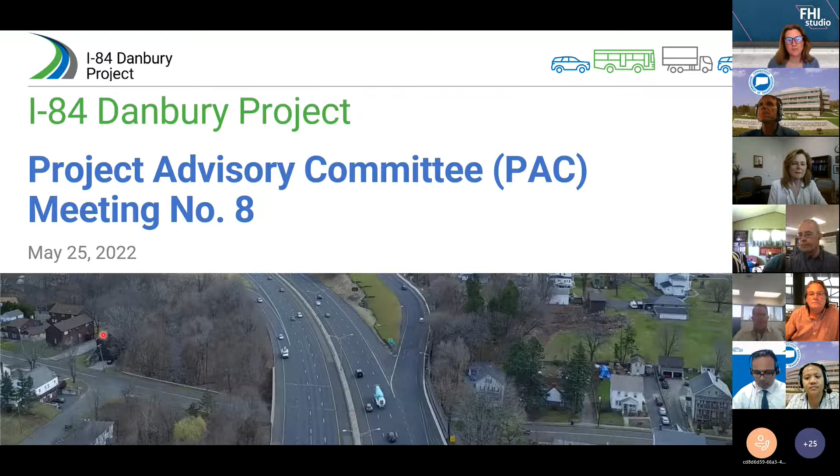Thank you. All right, welcome everyone. This is our 8th Project Advisory Committee meeting for the I-84 Danbury project. We thank you for giving us an hour and a half of your time today. We know that we'll give you some new information, and we hope that you'll appreciate it and have a lot of questions, and we'll have a great discussion.

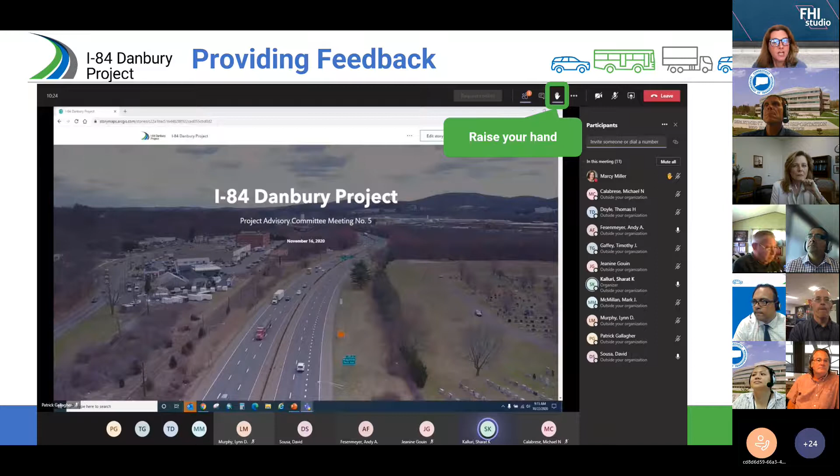I do want to mention a couple of things. We have some new speakers today, which is pretty cool. As many of you might have heard, Yolanda Antoniak has retired from the department, and we have Krishaline Macrahan, who has, I don't want to say taken her place, but she's taken over a prominent role in this project, and she's going to be giving a portion of the presentation today. So you'll hear from her. And moving forward, she's someone that we're going to work closely with.

We also have Jeanine Gouin. You all know Sharat. I don't think he needs a big introduction. And then Rick Black from SLR Consulting is also going to be there. And Andy often closes out our presentation, so we will also hear from him. And the other person from the department that I want to mention, who is not on the agenda, is Neil Patel. He is a big player and decision maker in this process, so he might be answering some questions as we go through today's meeting.

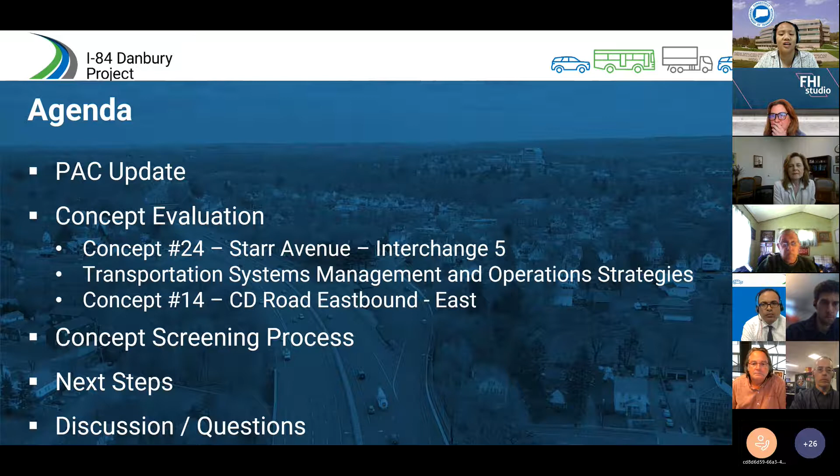We're also going to talk about the concept screening process, then next steps or the schedule of this project. And lastly, we will end this meeting with open discussion and questions. Next up. Okay, for the PAC update.

Since the last PAC meeting in November of 2021, we met with the New York towns virtually in December of last year. We also have a new PAC member, and we recently published a spring newsletter. We also added more concepts to the website. The newsletter and the new concepts are all available on our project website at www.i84danbury.com. So please visit that.

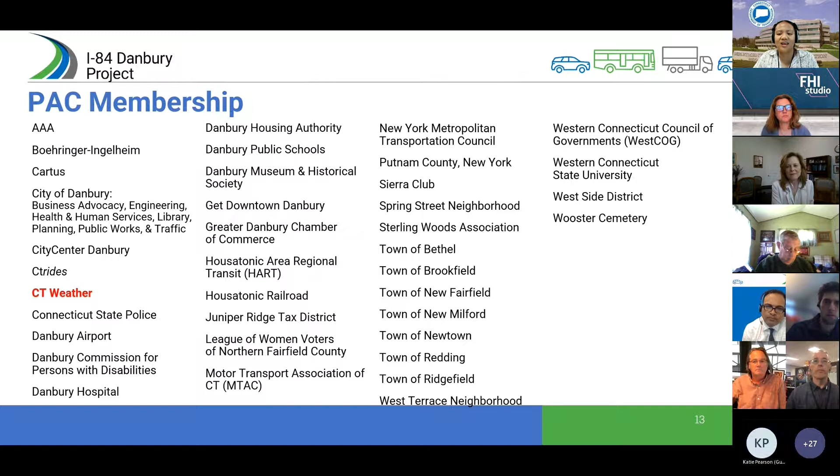Also, we have attended pop-up events in Danbury, and we continue to create social media content. We've been actively posting on Instagram and Twitter, so visit us at I-84 Danbury. Here's a list of our PAC members, and we welcome CT Weather as our newest member, as marked in red here. And with that, I will pass the presentation to Jeanine.

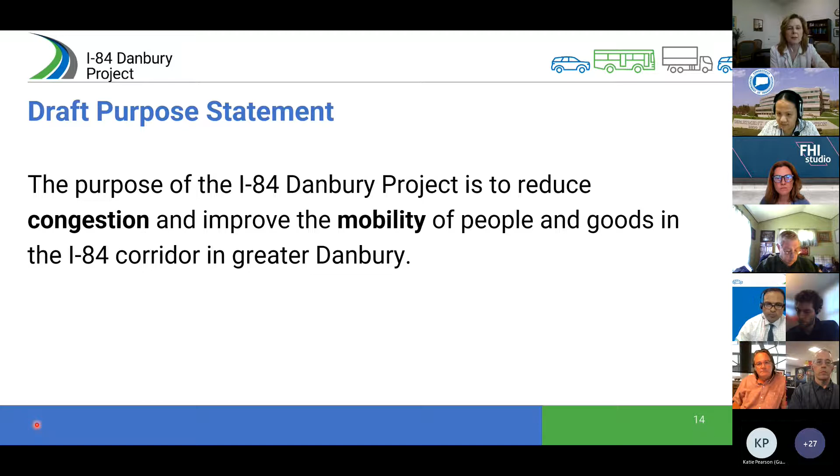And I just want to recall that congestion, as we've defined it, is characterized by slower speeds, longer delays, and queuing, something we've all experienced if we've driven on I-84 in Danbury. And mobility is the ability of a transportation system to effectively move both people and goods from one place to another. So they're related cousins, but they're different as well. So we can go to the next slide.

So how will that purpose statement be used? We're going to present a number of concepts today, as we did at the November meeting. These are partial solutions. Some are in discrete locations in the project area. Some are associated with the main line, others with a particular segment or an interchange. Each is being evaluated for its potential, first and foremost, to meet the project purpose. Does it reduce congestion, improve mobility, or does it have the potential to?

If the answer is yes, the concept moves forward. If it's no, it's eliminated from further consideration. And if it partially meets or has the potential to add to those objectives, then it moves forward to the next phase of analysis. Some of this will become clearer today, as Rick Black later in the presentation is going to talk about our screening analysis and how concepts move forward and how we will be evaluating them into full solutions.

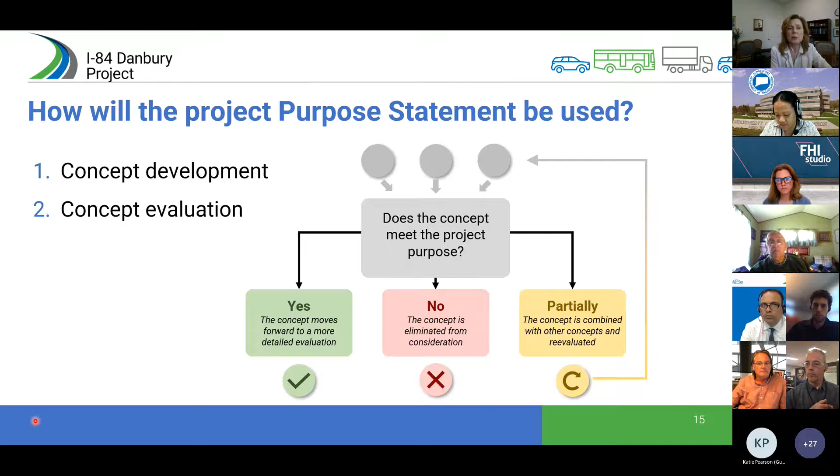You can go to the next slide. And I think you go, yeah, one more. So we're going to be looking at three concepts. We're going to start with concept 24, which I will present. And then Sharat will cover the dynamic lane use, which we also call TSMO, which I can never remember what it means, but Krishaleen just went through that. And then finally, we'll look at concept 14.

And I just want to acclimate everyone. You see in small green squares, we have the exit numbers, and then we've got Route 7 coming in sort of middle screen towards the bottom, and then upper right screen. And so the three concepts that we're going to look at today pretty much occur between the two locations where Route 7 joins and is parallel with I-84.

Okay, concept evaluation. Pop to the next one. So as with all of the concepts that we have and will evaluate, we look at a number of factors, including how the concept would affect traffic operations, effects to the mainline I-84, constructability. We look at environmental impacts, and we look at really very preliminary sort of order of magnitude cost estimates. So that's a constant. You've seen these before, and you will see them again.

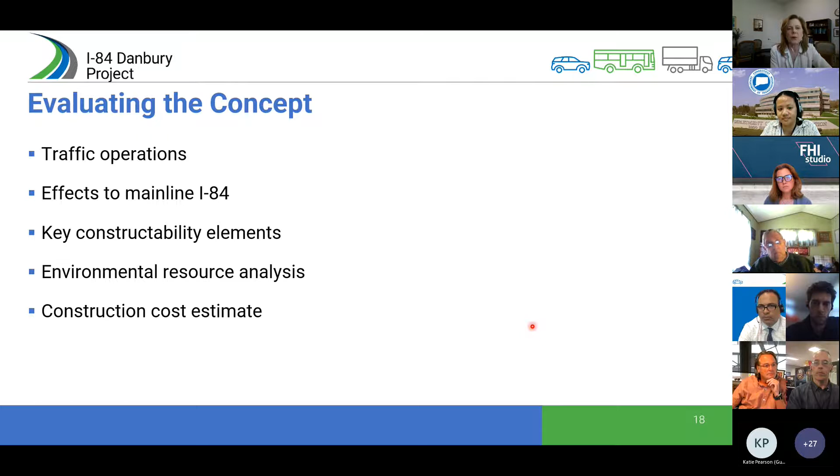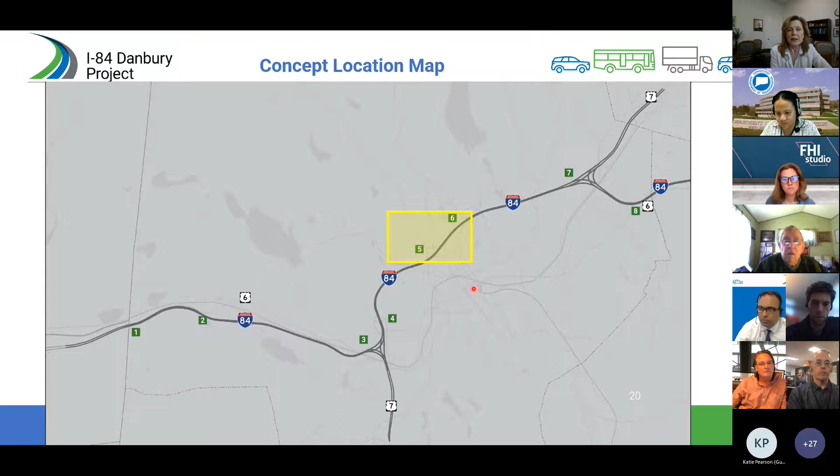Next slide. So yeah, concept 24 we call Starr Ave and interchange 5. This just gets us acclimated to where we are. And this particular concept occurs between interchanges 5 and 6. And again, this is sort of the segment of I-84 that is coincident with Route 7. And we call this the center portion of the study area.

So what is concept 24? There's two main aspects. It creates a new interchange on Starr Ave, and it adds what we call a collector distributor road, or a CD road. We will refer to that as we go through, between interchanges 5 and 6, which is essentially between where Main Street occurs and North Street.

And on this access, North Street will have full access to I-84. We'll also have access to the businesses on North Street that will be maintained. And it will provide access to the downtown area, as well as with many of the concepts that we'll look at, it gives us some opportunities to enhance bicycle and pedestrian use.

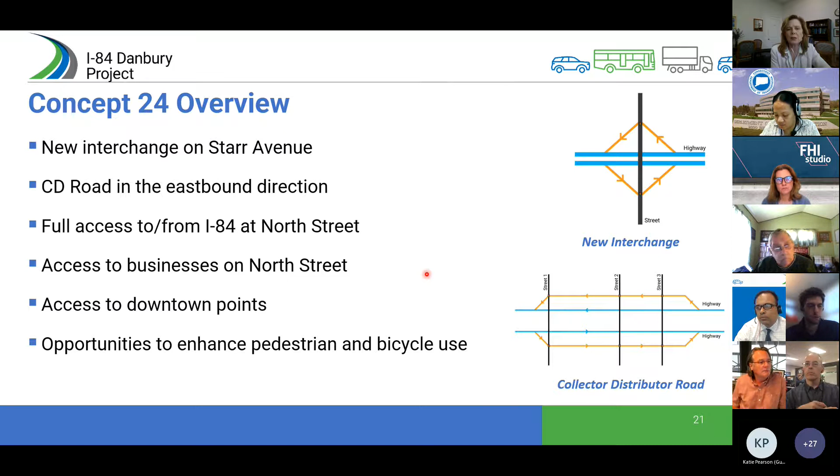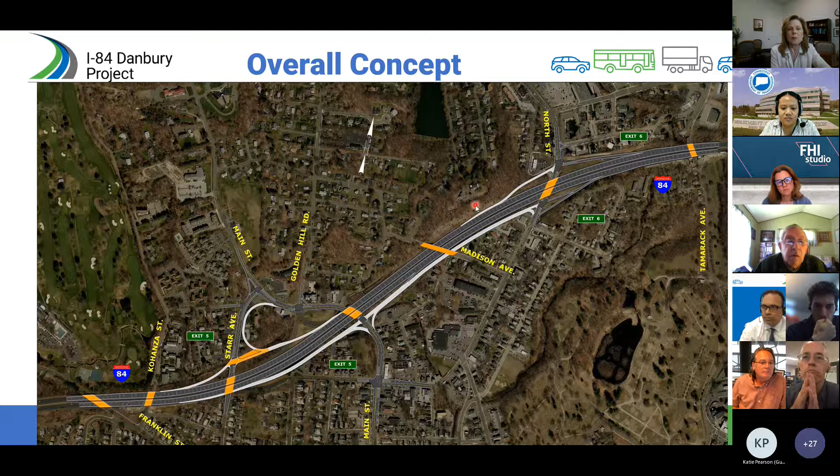So this is, and Sharat will zoom in and out. This is just an overhead view with the proposed new additions shown in that light gray. Any bridges that would be expanded or replaced are shown in orange. And then, westbound, we see the existing westbound ramps at interchange 5. Sharat can maybe point those out. This shows up better in another slide later, but some of those existing ramps will be eliminated.

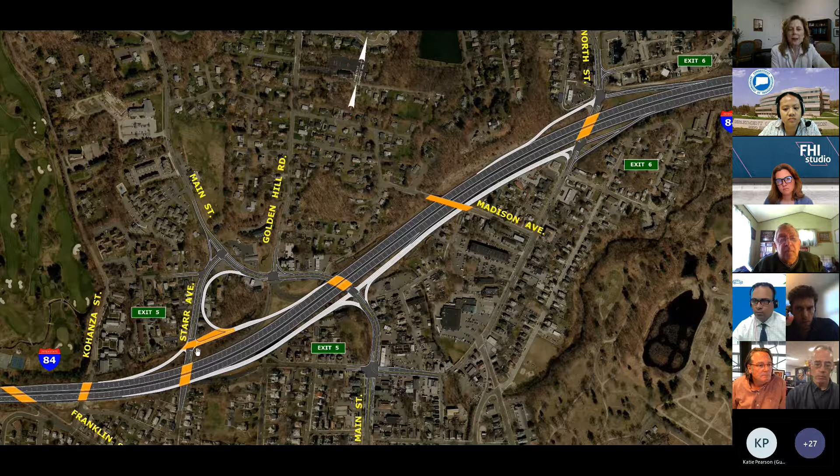And then the new interchange, which looks like a capital letter C, is proposed in the Starr Avenue area. Now the CD road, you see that on the lower part, will be a one-way, two-lane roadway that goes eastbound, and that will be parallel to I-84. Sharat, I don't know if there's anything else you want to zoom in on. I don't have anything else specifically. You can see exit 6 in the top right hand, and then exit 5 just to the right of where that capital C is. You can go to the next slide.

So one thing I want to point out, because we're looking at this concept sort of in isolation from the rest of any mainline improvements, it does not show, nor is it a surprise that it doesn't show, an improvement of congestion on the I-84 highway proper itself. But that is not necessarily the central focus of what we're trying to look at for this concept. We want to see more of the interchange and the local traffic patterns if this concept were actually implemented. So to evaluate the overall aspect of the continuity of I-84, we would have to look at this in combination with some others.

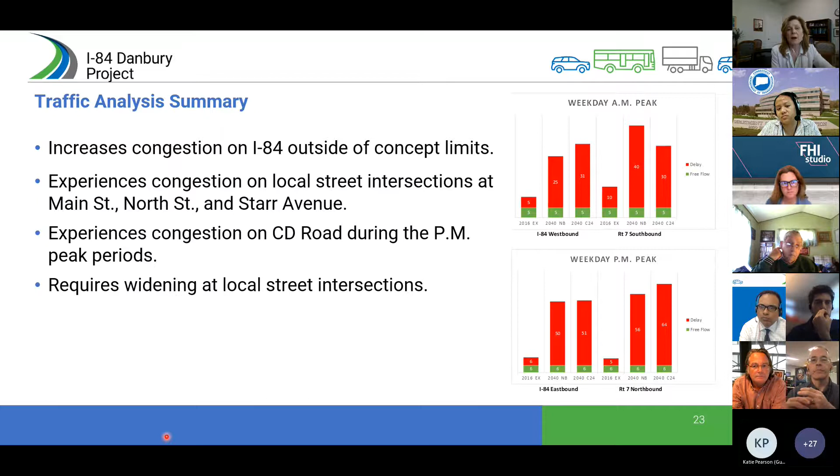But what we can see is that if this concept were implemented, it would actually increase congestion outside of the concept limits on local roads, and then on the CD road, as predicted by our traffic analysis during the afternoon peak hours. The other thing to note is that this concept would also require widening at local street intersections where they come in close proximity to the highway and to the new interchange.

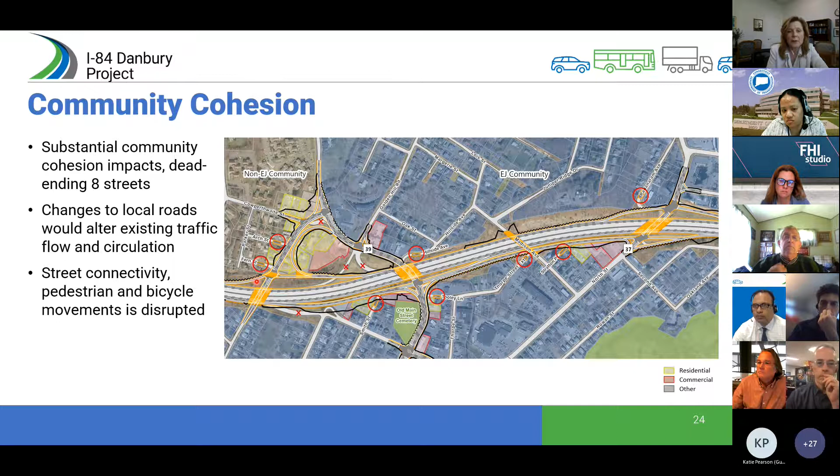The other thing, Sharat, if you can just sort of circle around the Starr Avenue new interchange area, you can see it's outside of that blue environmental justice community area. This entire neighborhood would be impacted under this concept. So all of the yellow and red shading would be land area that would need to be taken. And I think if we go to the next slide, we can really see that in much greater detail.

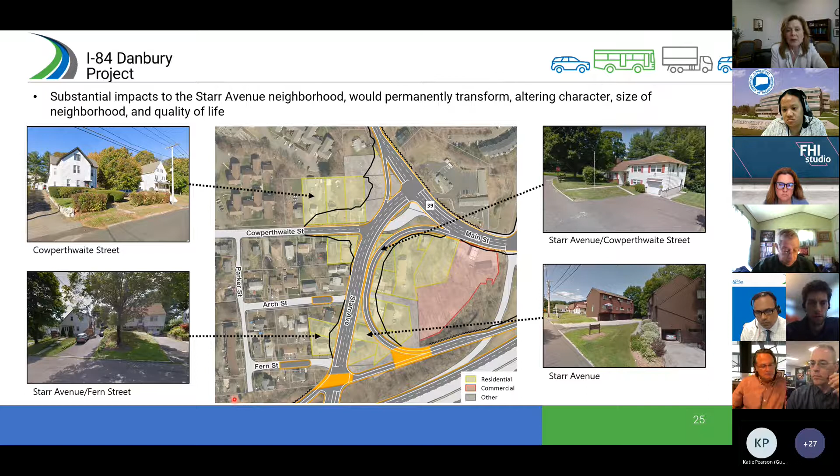It would also really heavily and irreparably impact this neighborhood, would take it from what it is today into primarily the off-ramp and some grassed areas at the expense of all of the current dwellings that we see here, as well as others that are not shown here. I think that was all I wanted to say about this slide.

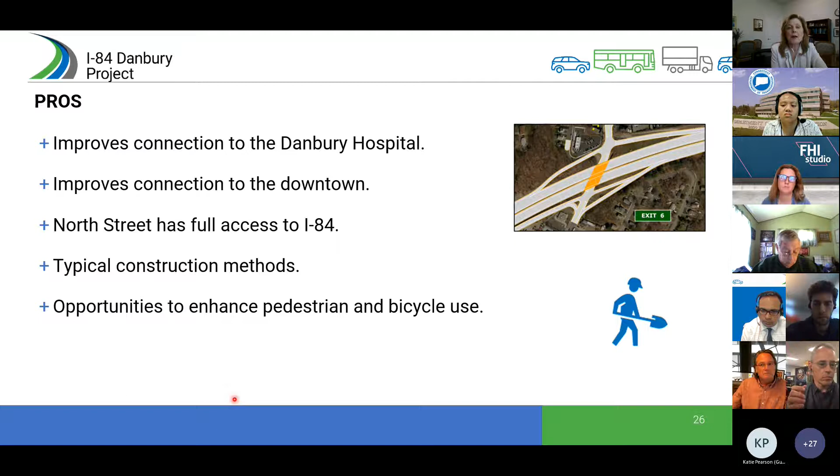So what are the advantages or pros of this concept? It would improve connection to Danbury Hospital and the downtown area. It would provide access from North Street. There's nothing particularly unusual about the construction methods that would be needed. And actually, this is a really important part: with every concept, we are looking at opportunities to enhance bicycle and pedestrian use. So wherever we're touching an area, that's going to come into play. How can we improve this for non-vehicular use as well as cars and buses and trucks coming on and off of the highway?

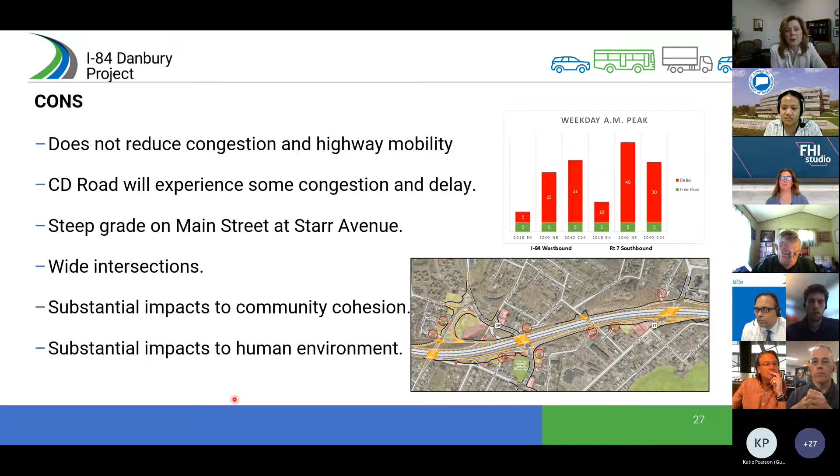Some of the cons: it wouldn't reduce congestion and improve highway mobility. It would cause some congestion and delay on the CD road. There are some fairly steep grades on Main Street at Starr Ave. We need to address that. It would create some wider intersections. But really, the headline here and the most significant piece of this is that this concept would result in substantial impacts, both to community cohesion and to neighborhoods, most notably the Starr Avenue neighborhood that we were just looking at in the last slide. So it's pretty significant.

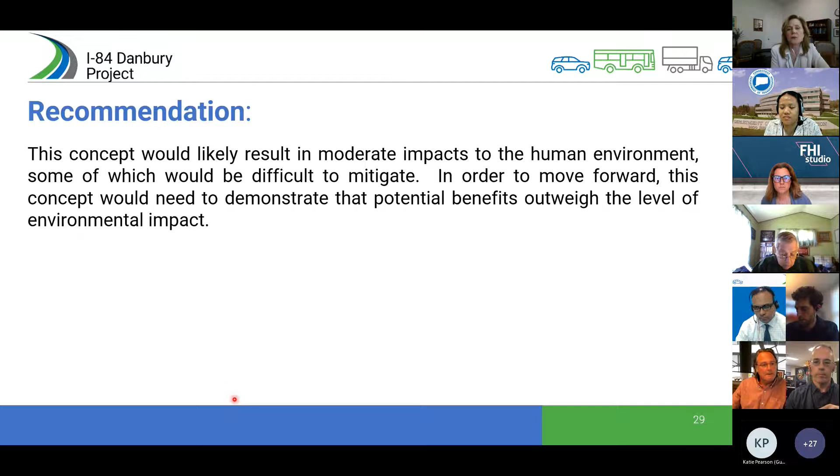So in summary, this concept is likely to result in impacts that would be difficult to mitigate, most specifically the impacts to neighborhoods and community continuity where roads would be dead-ended. In order to move forward with this concept, we would need to demonstrate that the potential benefits would outweigh the impacts. And this is true with many of the other ones that we look at. Keep that in mind when Rick speaks later about the various levels of screening analysis. I think that is the last slide for concept 24, and at that point, I'll open it to questions.

So back to me, I just want to chime in really quickly. If you're new to the PAC and you're not familiar with the term environmental justice or EJ, this is a term that represents certain populations that are typically underrepresented in our public process. So we are doing a little bit extra to make sure that their voices are heard. A lot of times this is lower income, minority, people with limited English proficiency. But it can also include students and seniors. So when Janine talks about these groups, it's really important, especially for any federal buy-in, that we're looking at these and making sure that we're reaching out to them.

Really good point, Marcy. That's the only thing I wanted to say. I'm happy you brought that up. And the only other thing I will say about that is we are held to a standard that, regardless of what project we do, we can't disproportionately impact environmental justice communities. Right. And some of these dead ends are bigger in this. So if anyone has any questions or comments, feel free to raise your hand or just chime in. We're very casual here.

Oh, I have a question. Barry. Have you reached out at all to any of the potentially impacted homes, or have you not even gotten to that stage? In other words, do you have any indication of how hard it would be to take those properties? It's a really good question. The answer is we have absolutely not. And this is why we are very early in our screening process. We would want to get to the point where we knew that a concept was going to move forward or had a high probability of going forward and being developed. We are not there yet.

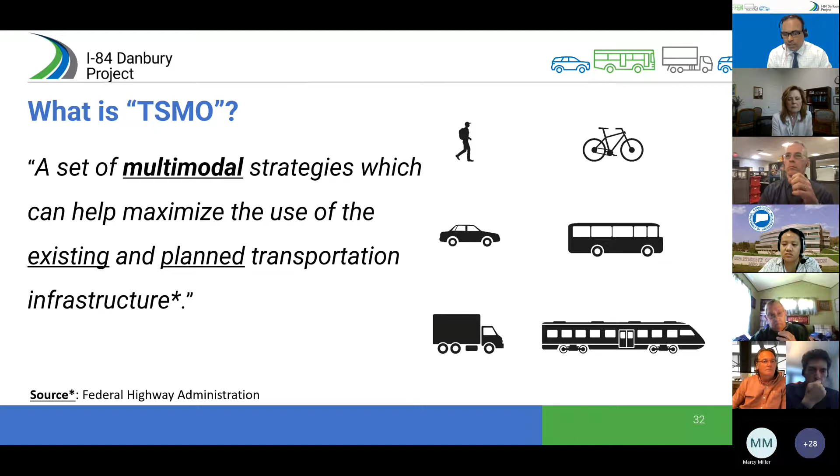And I know some of you attended our PAC meeting where we talked about Concept 4, which is a non-highway option, and that did incorporate some of the bus and rail recommendations. So why do TSMO? The important part of TSMO is it can be done in a very short time frame.

We're talking about like a 5 to 10 year time frame, maybe. It just requires limited funds, so it's not a big mega construction project. It's a very limited project with limited funds. And a lot of the TSMO options could use technology. So technology, as many of you know, is getting better and better every day, and technology allows things to be done in the TSMO option.

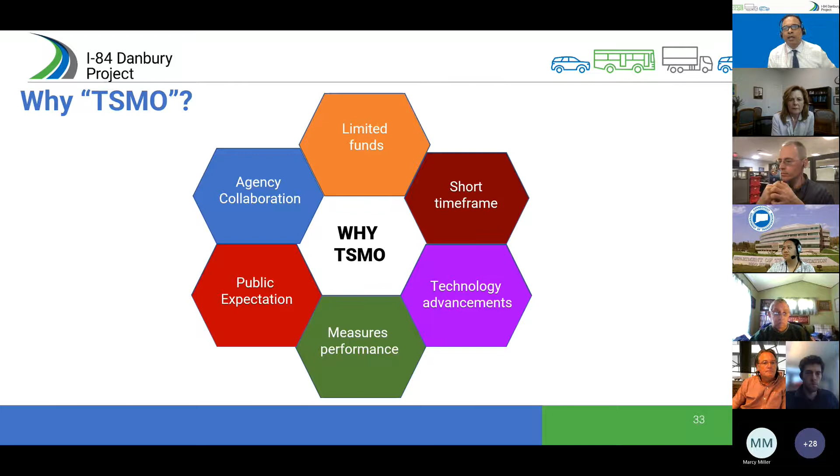So for the I-84 corridor, we looked at several of these strategies. There are almost 100 strategies in the TSMO handbook, and we kind of went through them and screened them and saw which ones apply. So some of these we're going to talk about, especially we're going to talk about the dynamic lane use in more detail today.

We did look at the temporary or hard shoulder running, which is the next one down. It didn't work, and this is some of the things you may have seen where you talk about bus on shoulder or cars on shoulder. I think Massachusetts runs this, where during the peak hours they run traffic on the shoulder. In this corridor, it doesn't work really well because the exits are too closely spaced. So we tried to look at this from an engineering standpoint. It didn't work too well.

The freeway ramp metering is a strategy which is used at the ramps, and you might have seen it mostly in the Midwest and South. I'm not sure how many of the states here use freeway ramp metering. Connecticut at one point had freeway ramp metering in Middletown, which got removed. It's essentially a signal that is provided at the ramp entrance, and traffic has to wait until the signal turns green.

We looked at some of these freeway ramp metering strategies at ramps along I-84 and Route 7. It didn't really work because it was creating a lot of congestion. Some of these ramps are really high volume ramps, and there was a lot of congestion being created on the side streets, and all the side streets were getting jammed. So freeway ramp metering, based on our evaluation, doesn't work well for this corridor.

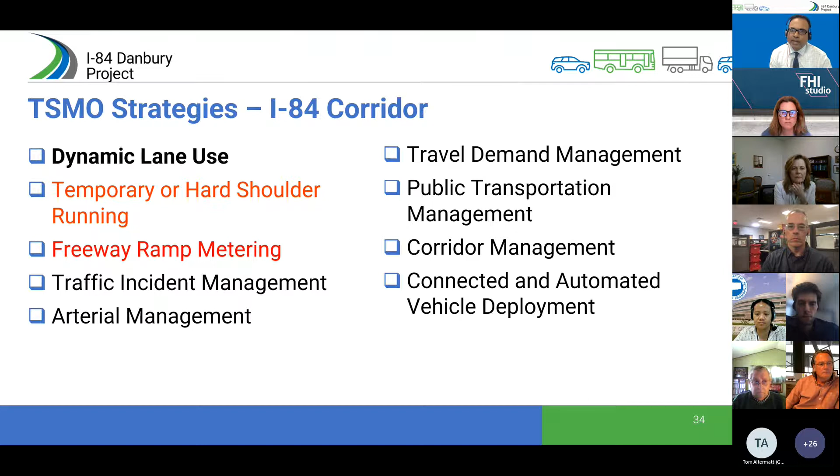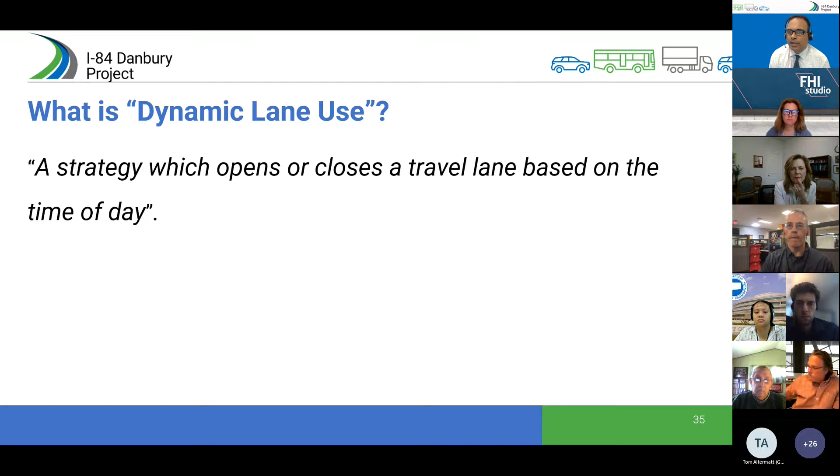So we're going to talk about dynamic lane use a little bit, and I'll get into a little bit of the details of what we are looking at here. What is dynamic lane use? So dynamic lane use is a strategy which opens or closes a travel lane based on the time of day. So essentially, there would be a travel lane that would be open or closed depending on the time of day. And you may have seen some of these applications. If you've traveled to the Tappan Zee Bridge, they have like a barrier that moves around during the time of day and shifts traffic around.

This is not exactly that, but something similar to that, where here we are applying dynamic lane use in the median. And the median, I'm assuming everyone can see my mouse here, but the median area is the area around the left side of the travel lanes. What we are proposing here is to widen that median area out to provide adequate shoulder, and use that shoulder for travel depending on the time of day.

So in the morning, for example, like this graphic shows, going towards New York where the volume is heavier, we would open that lane on the left side and traffic could now use the 4 lanes. This would essentially be the shoulder. And this is kind of done in many parts. People have used it in Massachusetts and other places where the shoulder is available for traffic to traverse on. And this will be indicated by that green arrow that says it's open.

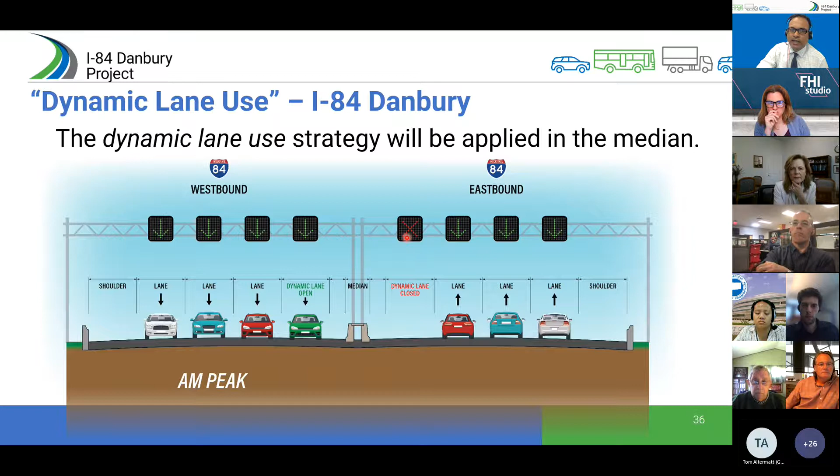In the other direction in the morning, which we don't need the 4th lane on, that lane would be closed. The X on the top would indicate that the lane is closed for traffic. So in the middle of the day, when traffic demand is not that high, both the lanes would be closed. Both these lanes, just to give you a sense of it, would be about 12-foot wide with some sort of shoulder.

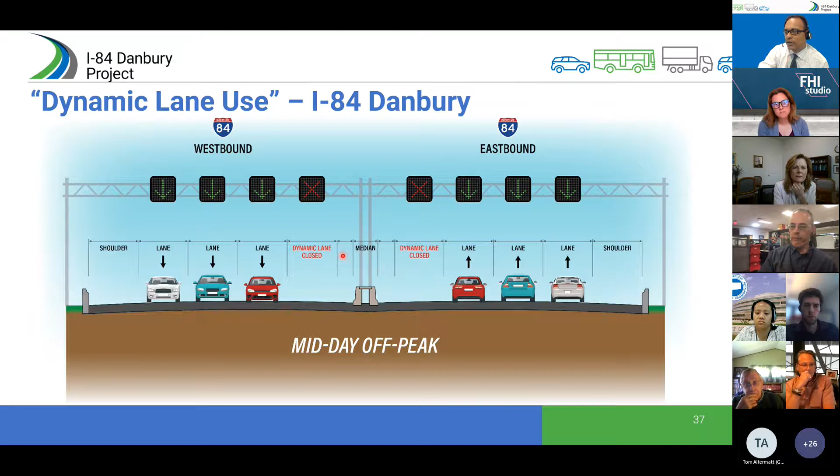We are still working on the feasibility of the amount of shoulder that we can provide there, but certainly there would be some shoulder available on the left side of that dynamic lane so that people are not too close to the median. This could provide some kind of a buffer use.

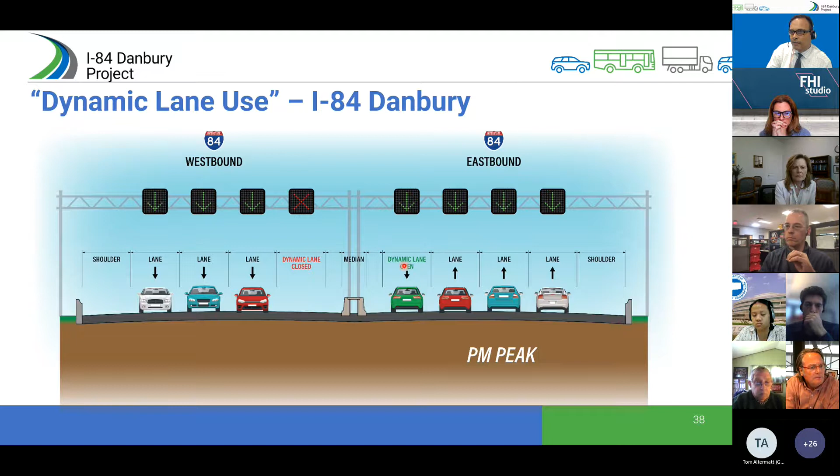In the evening, though, coming from New York and going towards Waterbury and Hartford, that dynamic lane would be open, and this essentially would provide that 4th lane. So we always had the concerns about the congestion in the peak commuting periods, and this 4th lane now is available in those peak periods and would help us support that travel to avoid the congestion that we see from the 3 lanes. Just keep in mind, a lot of these different combinations of dynamic lane use we are still evaluating, and we are looking at the feasibility of implementing it.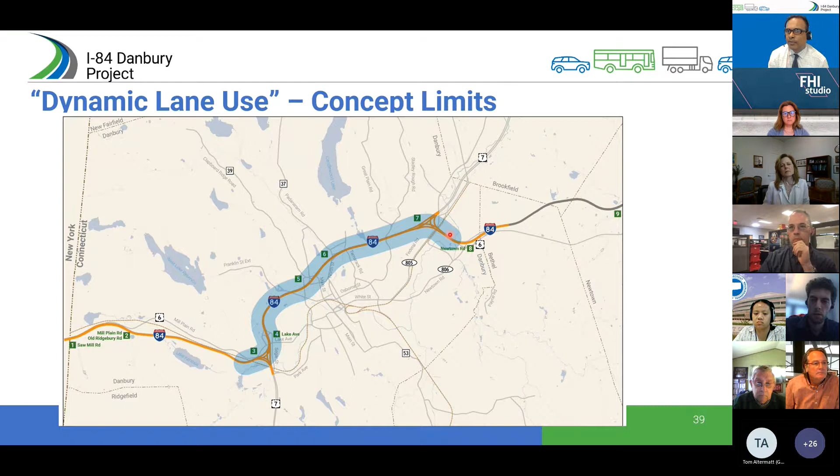So where would this be implemented? The limits of this implementation would be between the two 7 interchanges, between interchanges 3 and 7, denoted in this light blue area. We are looking at exactly where we would start the implementation of this option. It may not be exactly where 7 comes in. We may have to do it before 7 comes in on the west and 7 comes in on the east. So that's something we're working on. But just to give you a sense, it's not going into New York or going past Danbury to the east. It will be implemented within the two 7 interchanges.

This is just an aerial rendering of how it would be. There would be a gantry on the top, a lane use sign that indicates which lane is open. If this is westbound, in the opposite direction, the eastbound, this sign would say X on top, so you can't use the shoulder. So here, this shoulder would be available for people to drive on if they're headed towards New York.

One of the things we've got to keep in mind, and I think we talked quite frequently about the 7 interchanges, is that all the exits to the 7 interchanges are to the left. So the traffic that's on the shoulder is oriented towards the 7 South or 7 North areas. We want to make sure they're not forced to move 2 or 3 lanes to the right to stay on 84. So putting this highway signage up is going to be very key for us to make sure traffic is staying in the correct lane as they are driving through this corridor.

Some example projects in the US. We did some research and looked at other projects that are happening in the US. There are a few popping up in Michigan. Wisconsin is also constructing a project on Route 12 called the US 12 Beltline. Pennsylvania is also currently doing a project, but here is a similar use where in Michigan they are using the shoulder with the arrow pointed down to be open in the time period that they need it and closed when they don't need it. So this is going to be similar to what you will see if this project moves forward with the TSMO related to the lane use. So there'll be more signage and information available.

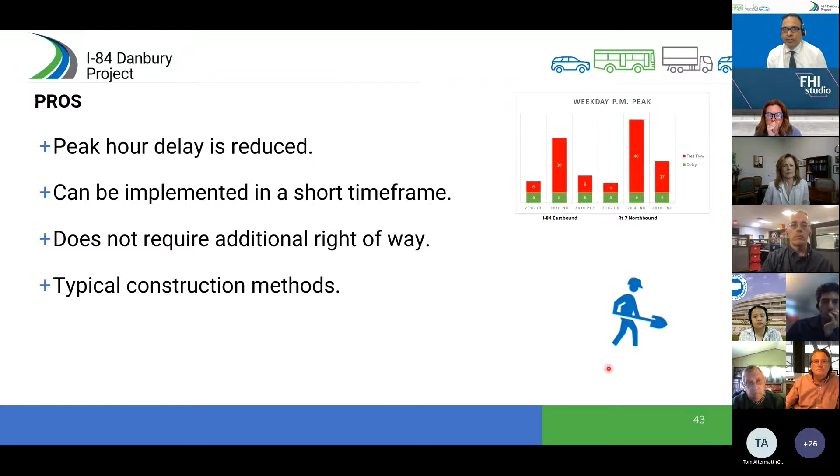The cons is, as many of you probably have not seen this in Connecticut, it's a new thing in Connecticut. So driver familiarity and confusion. So kind of using and following signs and making sure the proper directionality is given to drivers to get to where they need to get to.

The other con, which is important, is the left shoulder now, which many travelers today use for any kind of breakdown areas, cannot be used anymore. So if the lane is in use, the left shoulder cannot be used as a breakdown area. That shoulder that I showed you on the left side is going to be very small. It would not be adequate to be used as a breakdown area.

A few other things, obviously we're not going to be improving lane continuity because these 4 lanes are only going to be limited within the 3 to 7 corridor. We are not going to be eliminating the left-hand ramps. Those left-hand ramps will remain, and that's mainly the reason why this is the low-hanging fruit or the short-term improvement that we could implement right away. And the signage I talked about to make sure that we're directing traffic to be on the specific lane they need to be to get to their destinations.

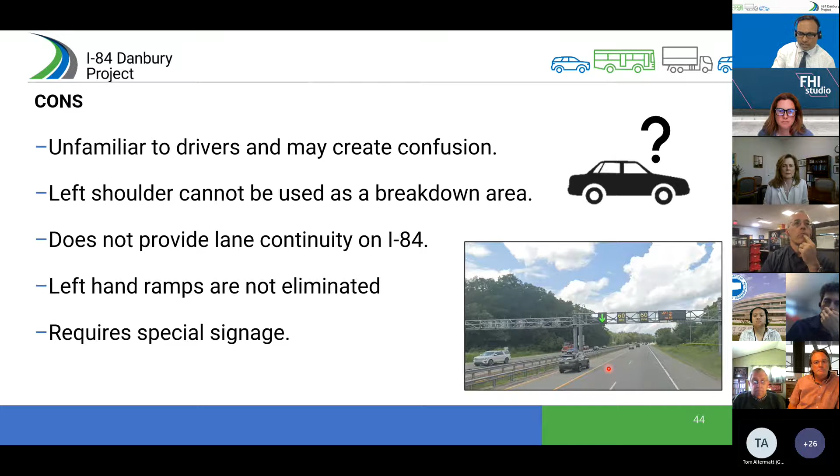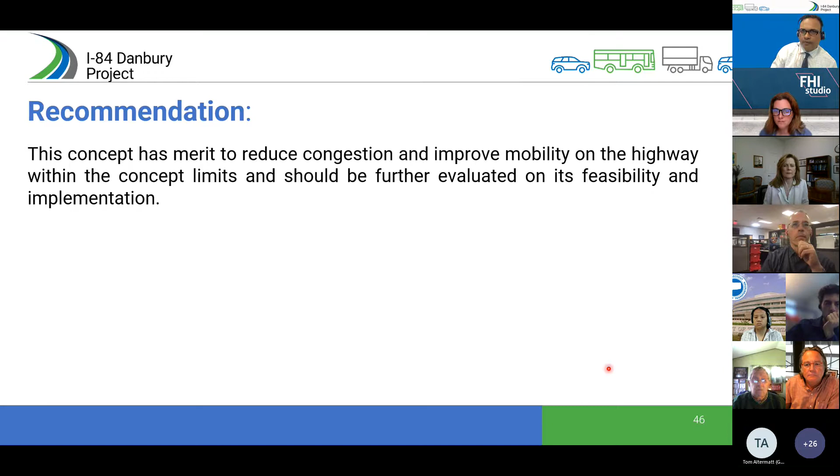We are doing a construction cost estimate, but we definitely know that this is going to be less than $500 million and definitely within the shorter time frame range. So our recommendation is to evaluate this concept much further. In fact, we are doing that now, and we do see there's a benefit here to reducing the congestion, improving mobility, as Janine was talking about the draft purpose. With that, I'll pause for a second and take questions.

All right, I'm looking. I don't see anyone raising their hand yet, but usually we have a slight delay. Does anyone have any questions for Sharat before we move on to the next concept?

It's Matt Cassavechia from Emergency Services. I just had a question about emergency vehicle access and some of these projects that are ongoing throughout the United States. What has the feedback been as far as utilization of that left lane that typically emergency services do use when there's heavy congestion and there's an emergency in traffic?

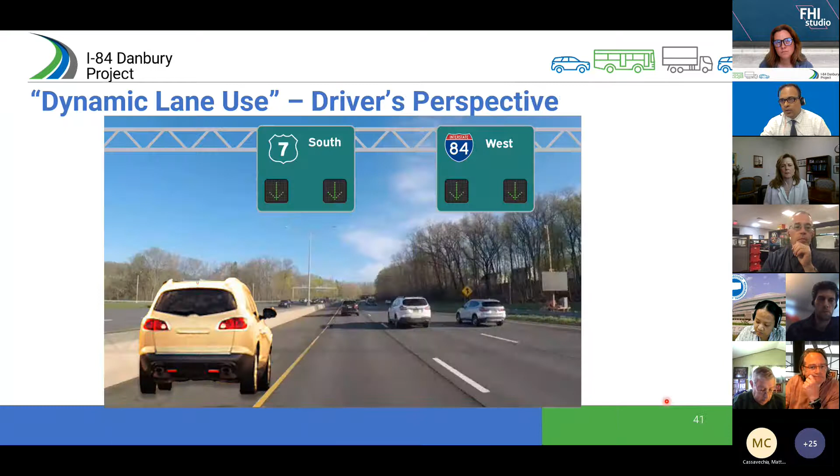So Matt, to answer your question, during the peak hour when that shoulder lane is open, it's going to be difficult, but certainly there's going to be cameras that'll be monitoring this. There's going to be heavy camera monitoring and signs. And I think a lot of states that are implementing this are putting cameras on the gantry in a frequent interval. So if there's a need for emergency responders to go through, they could shut that lane down. So the actual gantry that has the down arrows for that duration, you could turn that off to an X and prevent any further traffic to come on that.

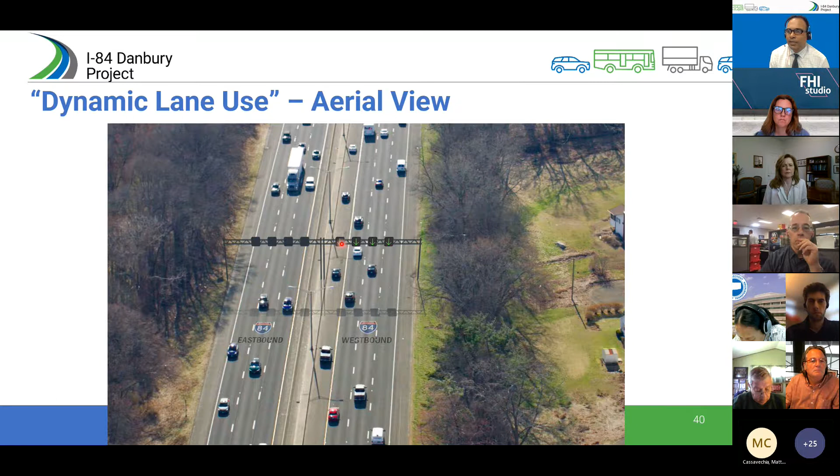But unfortunately, that lane is what is going to be used during that peak period. So if it's an off-peak period, like Michigan does it in the example I showed you, if the lane is not in use, that certainly is a usable shoulder. It's going to be a wide shoulder, so in the direction that we don't need it, you can certainly use that for emergency response.

I think what they're doing is trying to put as many cameras, and you might see here they put a camera on top. I think it's important to get that information out to the emergency responders and also for the traffic to make sure that the lane will be closed because there's an accident or incident out there. Thank you.

Other comments, questions? All right, we can always go back to this. Sharat, you want to move on to 14?

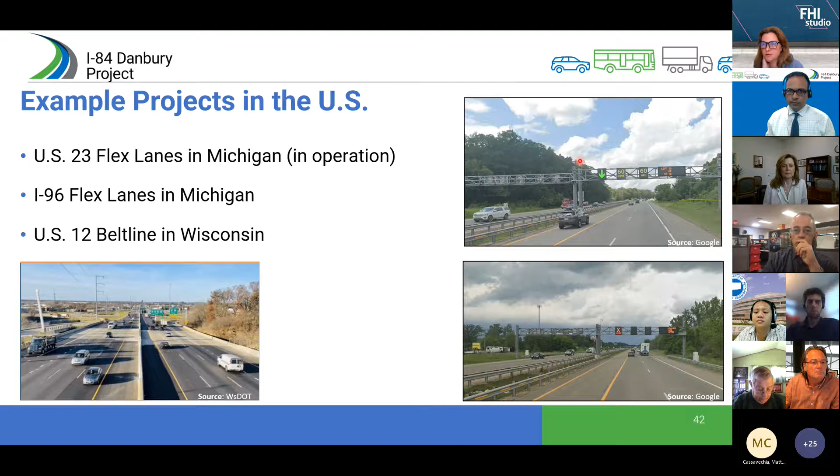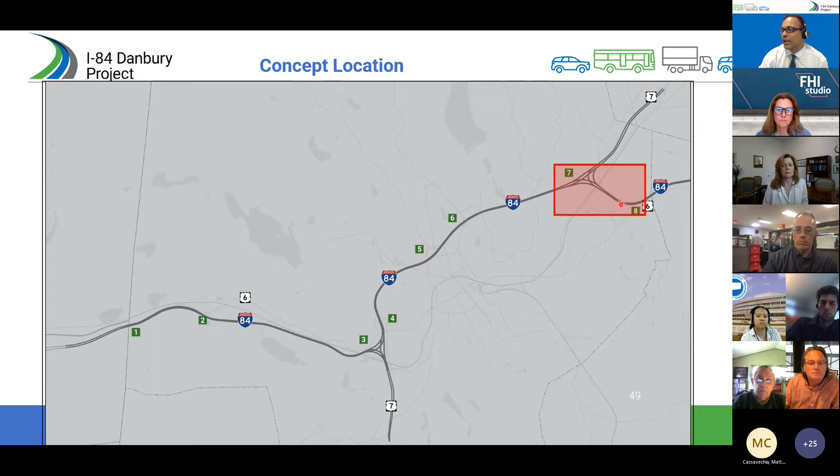All right, so concept 14, as Janine was introducing it, this is a concept on the east side. We are talking now the 7 South and the north going to the New Milford area, and the exit 8 area, which is the Newtown Road exit area. So looking at the toolbox that we used here, we were looking mainly to address the weave condition between interchanges 7 and 8, and we did that in the eastbound direction by providing a CD road. So we used the CD road as one of the toolboxes.

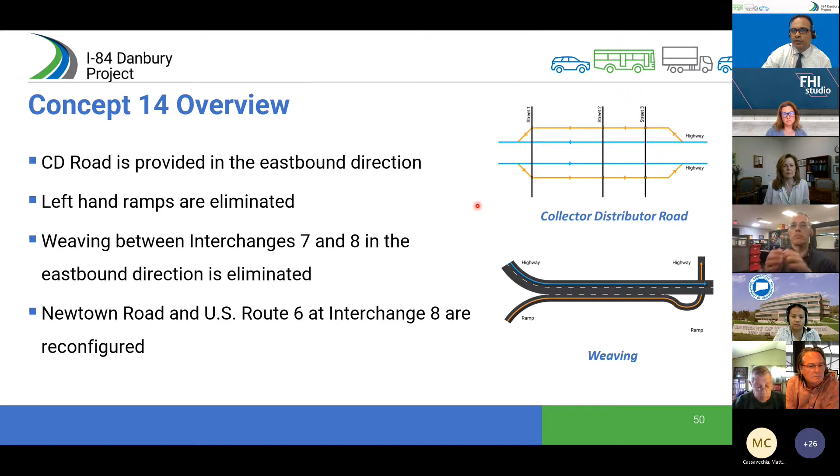Many of you had mentioned during our prior PAC meetings and also identified that the 7 South movement coming from New Milford and Brookfield and going towards 84 headed east towards Hartford is a difficult move to make if you're on that 7 South ramp trying to get to Newtown Road. So that was one of the focuses for this concept, to look at how we can improve that connection from 7 South to interchange 8, which is Newtown Road. Also, we eliminate the eastbound left-hand off-ramp, which goes towards New Milford. So here's a graphic. I'm going to zoom in a bit.

Okay, so this is 84 going eastbound towards Hartford. Today, when you're going eastbound, you need to go to Route 7 North. You're on the left side. This is the existing 7 off. In this option, we would switch the ramp to the right side, and this would be the new 7 North

movement. That ramp that would now exit at 84 eastbound would become what's called a collector distributor road, and that collector distributor road in the eastbound direction would serve exit 8. So if you are headed towards exit 8, there'd be a sign for traffic to make this exit on the CD road to get to exit 8.

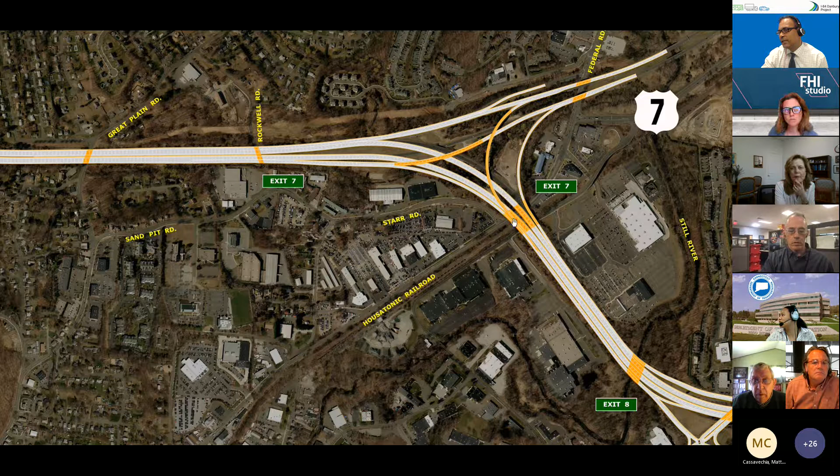This CD road also would now take the 7 South ramp and merge that into that CD road, which will then get rid of the weave today that happens from 7 South to 84 East. So that 7 South traffic now is on the CD road and then can get to Newtown Road over here. We also provide what's called a slip ramp, a ramp that someone can use.

So this is mainly for people who are coming 7 South and want to get to 84 East. They would use the slip ramp to get back on 84. So if you're coming 7 South, you don't have direct connection to 84 eastbound. You would have to use the CD road to get to 84 eastbound. So there's no change in this specific concept.

We have a similar concept 15 where there was a CD road in the westbound direction too, but this concept does not have a CD road in the westbound direction. And so this concept keeps the existing condition as is. So there's still going to be that merge and the diverge from Newtown Road and Route 7 in the westbound direction. There's no change there.

But eastbound, we make that big improvement to put that 7 South traffic on the right side and make sure they're not cutting across 3 lanes in 500 feet, which is what happens today.

We should go back. Did someone say something? Everybody got it? No, I'm sorry. We lost our internet. We just came back. That's all. Sorry. Okay, no worries. I'm going to move on.

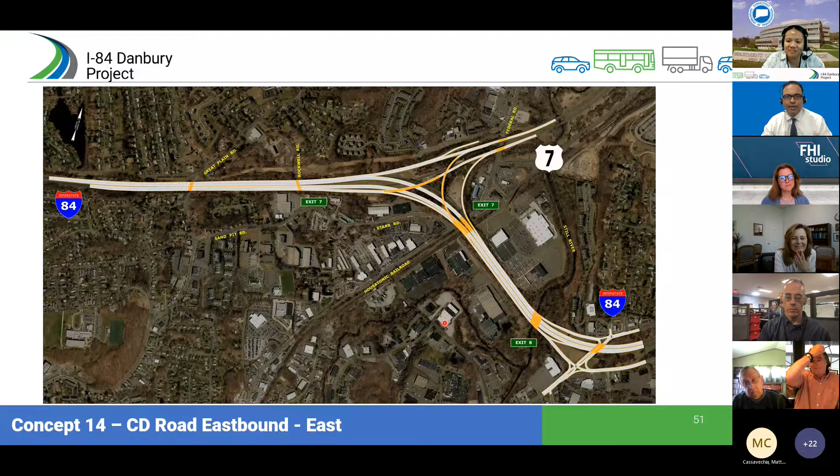So in addition to the improvement that's made on 84 and Route 7, we are also looking to improve this whole interchange 8 area, which is what we call a turtleback; it looks like a turtleback and has a lot of movements that go around this loop. So there's an idea here. Again, this is one of the ideas how we can improve this specific area. And I'm going to point some arrows. There's 3 specific movements I'm going to point.

So if you're on Newtown Road today and want to get to 84 westbound, you have to traverse Newtown Road, go eastbound on Route 6, turn around, and then almost go through this westbound section and go back onto 84 westbound. What we are proposing here is that movement would now happen more directly, not having to go through several traffic lights that they go through now.

How we do that: if you're on Newtown Road, there'll be a traffic light here, and you will be put on what I call the wrong side of the traffic. You'll be put on the left-hand side, and then that would allow you to get a direct flow into 84 westbound. This is a new interchange concept. It is becoming very popular now in many parts of the country. In fact, Connecticut is looking to implement one of these in Norwalk.

This is called a diverging diamond interchange. And essentially the whole purpose is you're taking those left-hand movements out of that traffic flow and putting them on the left side, and they don't really get any conflicts. In this case, they would directly go on the highway. So this avoids about 600 to 700 cars circulating around through this area and going through several traffic lights trying to get to 84 westbound.

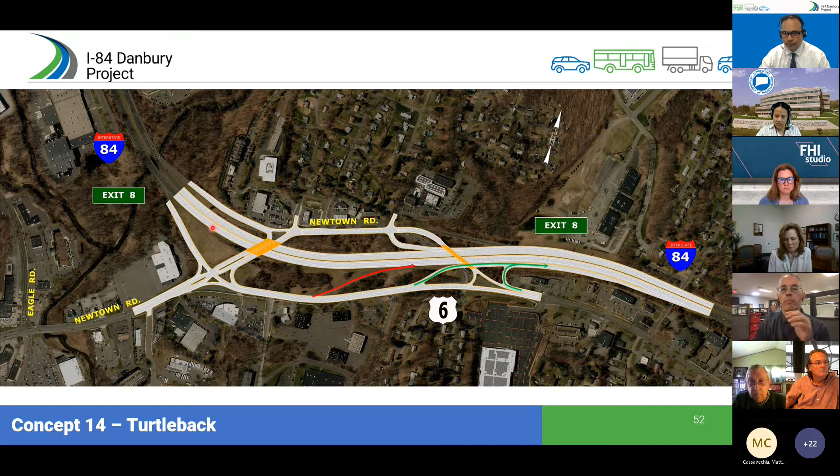So some of the pros of this concept, we eliminate the left-hand ramps at interchange 7, mainly the Route 7 ramps. We found a delay reduction by doing that, especially by switching all the ramps. And just to keep in mind that this delay is only measured within the limits of the concept. So obviously, as Janine was talking about combining the concepts, we will be combining these in the greater scheme of things as we move forward.

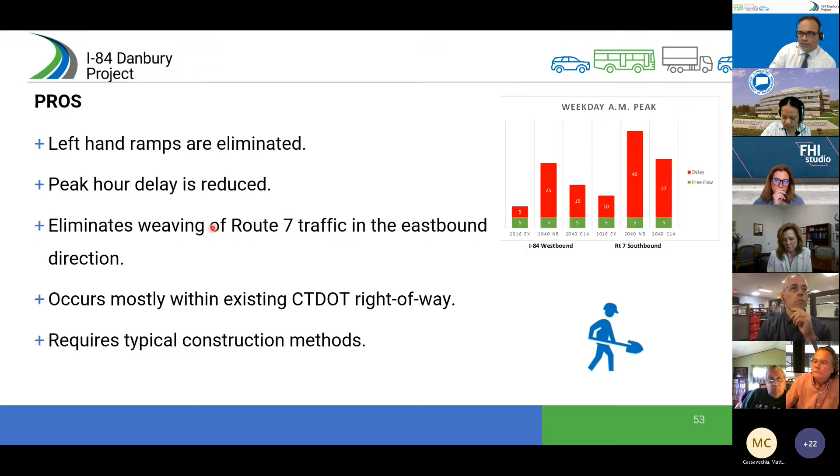We eliminate the big movement of Route 7 traffic in the eastbound direction that doesn't have to weave anymore. This improvement is within existing DOT right-of-way and is constructed with typical methods. The cost estimate again is in the first dollar sign, so pretty inexpensive related to the overall project.

So we are recommending this concept be moved forward and be combined and look further to address highway congestion, highway mobility, and mobility adjacent to the highway. So this is a positive concept for us, and we are going to be moving this forward into the next stage.

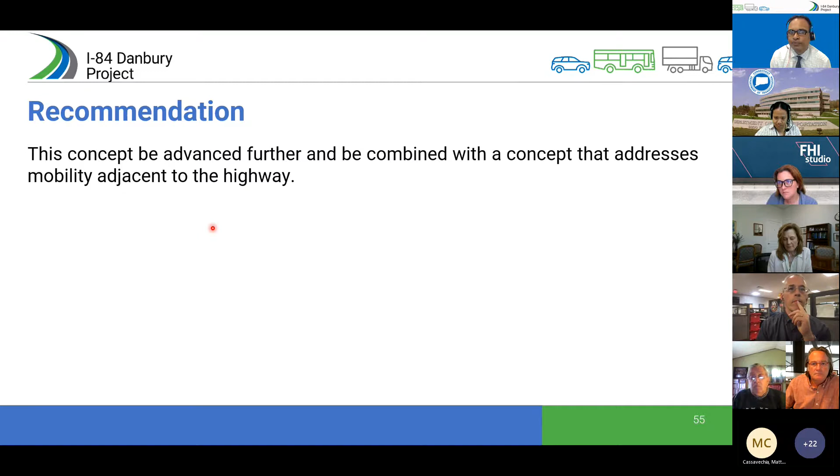Any questions? Comments, questions? I know this is a lot and some changes. How do you feel about this? Do you want any clarifications? All right, I don't see any coming in. Feel free to hold questions or we can go back to this later. And I think, Rick, you're up next, right? We have one more little segment of our presentation, so we hope you'll be patient with us.

Thanks, Marcy. Yeah, I'm Rick Black. It's good to meet you all virtually. I am a year into this project, but I have about 35 years of transportation planning experience. So I'm thrilled to be working with this team. This has been a great project.

So in our next steps, we'd just like to walk you through where we are in screening and what you can expect to see as we continue down into PAC 9 and PAC 10, wherever we end up. And as you are all painfully aware, we've gone through a myriad of concepts already, broken down again into 4 segments. And some of this is redundant, but I think it needs to be set up again for the screening. We've got these 4 segments: east, center, west, and main line.

And it would obviously be really ideal if we came out with one perfect concept from each segment that could be combined into a combination that works. But obviously that's not the case. So we're going to be going through some screening criteria. And we want to develop a screening criterion of fatal flaw analysis, that it just doesn't work, and then compare each concept against one another within each segment.

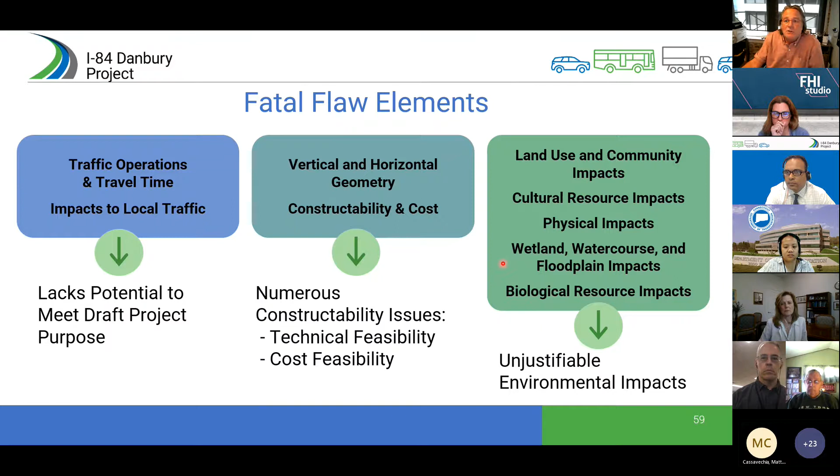Let's just say here, for example, we've got 2 lane widening projects. One is going to widen to the north, one is going to widen to the south. And they may serve the function. It may decrease congestion, increase mobility to the same degree. It's a beautiful concept, but one of them is going to take out a whole neighborhood of residents and businesses, and the other is on open land. So we are looking at the built and the natural environments when we're looking at environmental impacts.

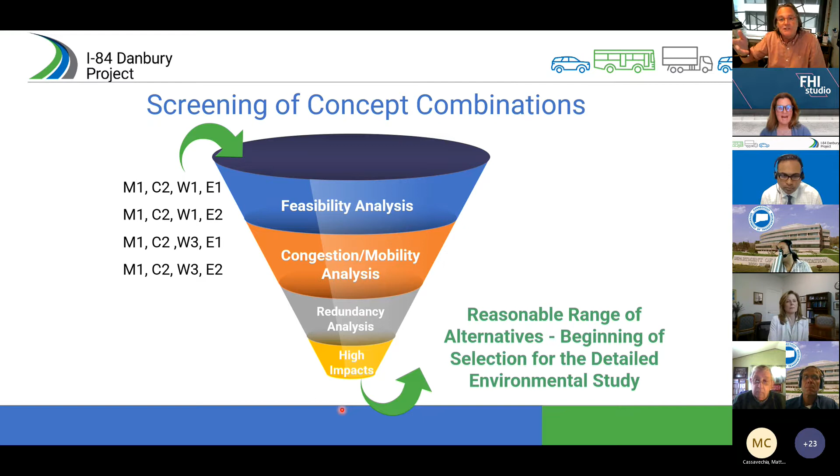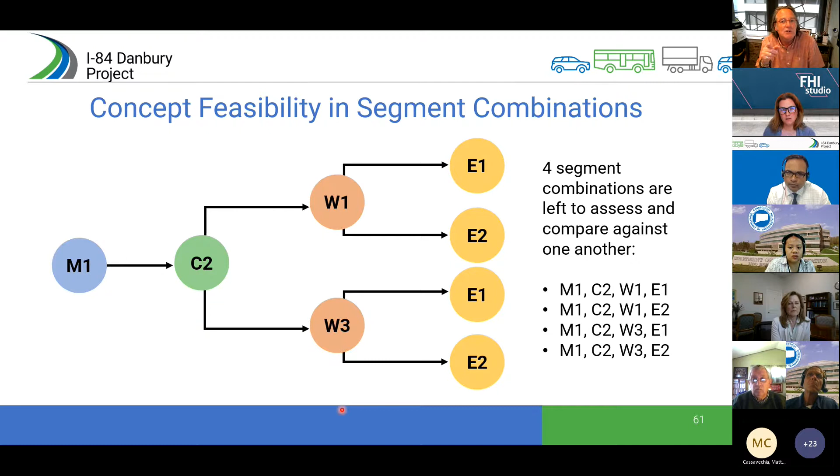Exactly. So Sharat, will you go back to the very first next step slide? That last funnel that we were looking at, go all the way back to the very first of mine, the next steps. It's this second to last arrow, the segment combination screening. So when we are at that funnel, we have looked at all of our 1 through 27 concepts. They've been screened for fatal flaw analysis. They've been screened against each other in segments. And some of them have been screened out.

Some segments might have all of the concepts still make it through. They've then been combined into every possible combination mathematically that's possible. And in that second to last arrow here is that funnel where we are now going to look at the feasibility and compare these combinations of segments against one another. So I hope that cleared it up.

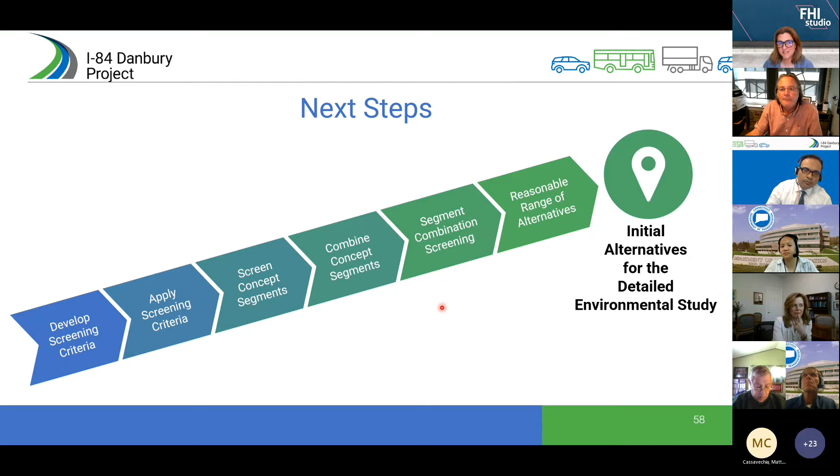Thanks, Marcy, for that. All right, PAC members, we're just about done, but does anyone have any questions for Rick? I think we have Andy wrapping up shortly, but if anyone has any questions or comments on the screening process.

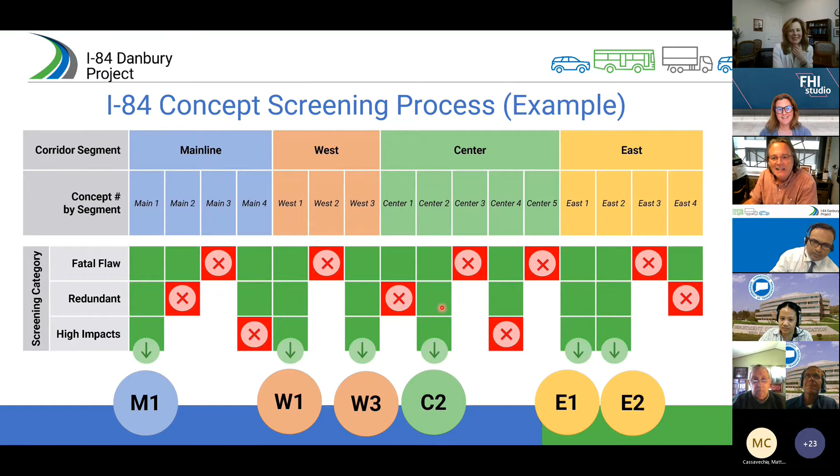All right. We've stunned them into silence, Marcy. They're either totally confused or it was well done.

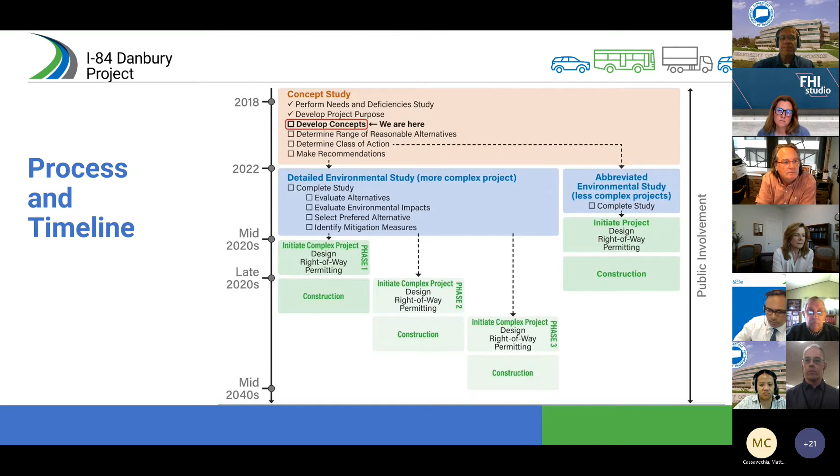So our next steps. The concept development phase is winding down. We should hopefully have all of the concepts on the website shortly. We're still wrapping up the analysis of some of the newer concepts, but we're almost there. And then we're going to start switching gears, and Rick gave you a little taste of it today, and the screening is really going to be the focus of the next PAC meeting.

And then we're going to get into combining the concepts. After we've screened out what we can, we're going to combine them and turn them into these alternatives, which is ultimately going to get us to that range of alternatives. So that's kind of our next milestone, and we're getting there. Like I said, the next PAC meeting is really going to focus on screening, and that next PAC meeting is June 22nd. So hope to see everybody there then.

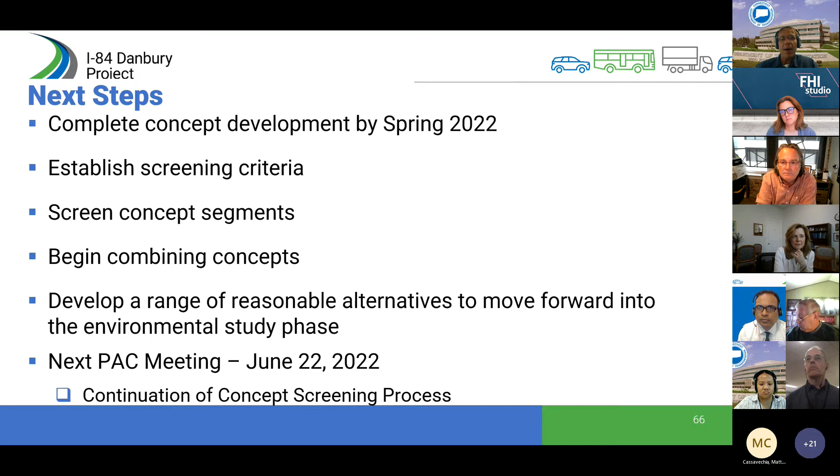Let's open it up for questions one more time. Right, and I would also like to encourage you all to go to the website. We have 4 new concepts that have been posted there in the past few weeks. I expect we'll have another 2, including some of the stuff we're discussing today, in the next several weeks. So we are doing our best to update it pretty quickly so that you have good stuff.

We're going to be doing a lot of pop-ups this summer, some really cool events. And we're going to go out to the public with all of this information and just have some really good conversations.